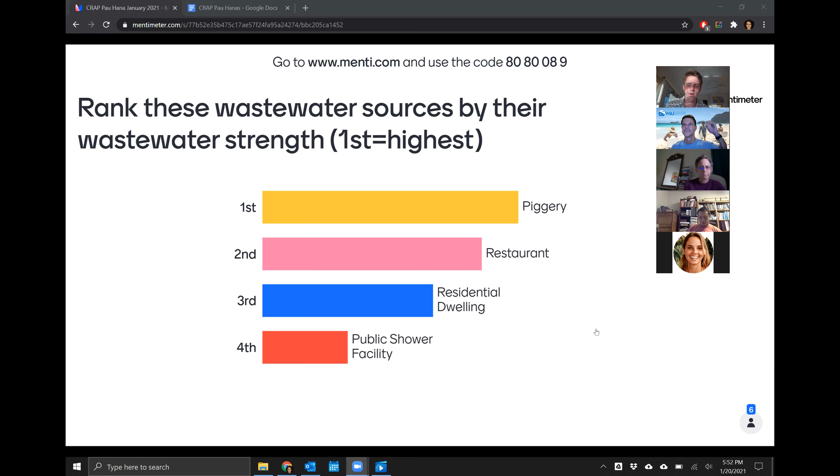Great job. And then the second and last question coming in here. So that should pop up in your phones right now. So piggeries is an example of a high strength source of wastewater. It's higher than your average. So what other sources? We had restaurants, we had a piggery. What other sources of high strength wastewater can you think of?

Got commercial, grease trap waste, distillery, breweries. Good ideas. Industrial, yes, those are all really good answers. Gonna give 5 seconds if somebody else is still thinking of something. Awesome. Great job, everybody. Thank you for participating in that.

All right, now we show the film as we queue up the film. This is a film that was done about our new Cinderella incineration toilet. Forgive the narrator or the key figure in there for his speaking abilities. And this is about the HIMB facility we just did. So go ahead.

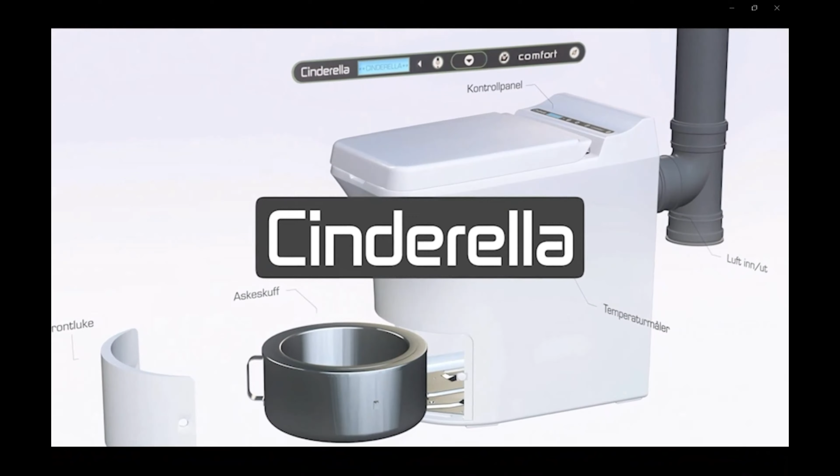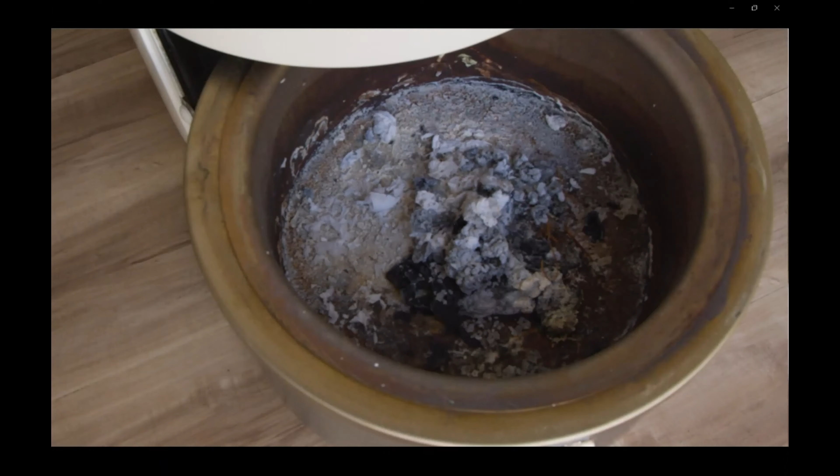So we're here on Moku o Lo'e, which is the home of the Hawaii Institute of Marine Biology. We're an organized research unit within the University of Hawaii, and we're housed in the School of Ocean and Earth Science and Technology. And we focus on all aspects of tropical marine biology. So we have an incineration toilet that is being installed here. We're very excited about it because it's an alternative to waste disposal, which essentially burns waste, both solid and liquid, doesn't require any hookups to municipal systems, produces very little emissions, requires no water. All of these things are important considerations.

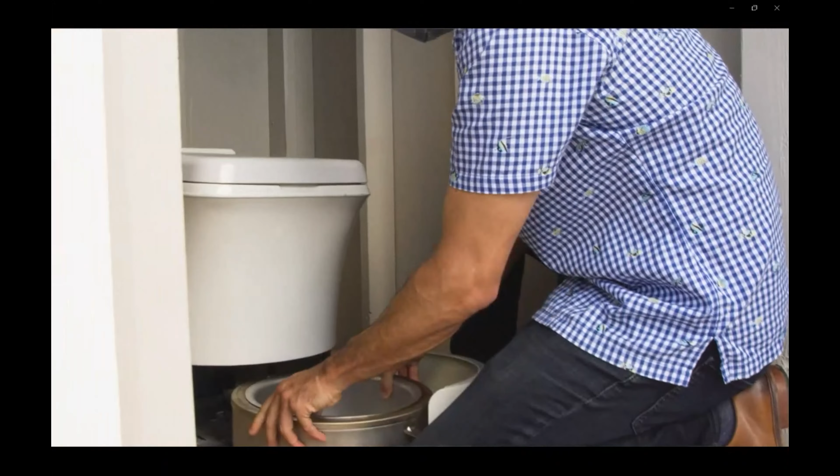We need to solve the problem of sewage in Hawaii in general. Here in Hawaii, we have over 80,000 cesspools that still remain, and it makes us one of the most impacted states anywhere in the country. And we're not going to be able to change that out overnight. So we really need new kinds of technology, new kinds of approaches that are going to revolutionize the way that we fund and build sewage systems to address that. We've only got a couple decades to meet our legal requirement, but really we want to move there as fast as possible, because each passing year you have more and more runoff, more and more leaching of this kind of raw sewage into our streams, onto our beaches. It creates a health hazard for everybody.

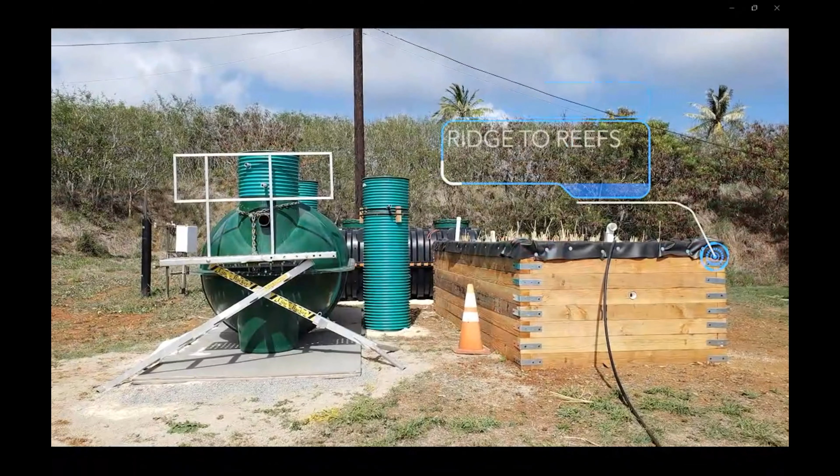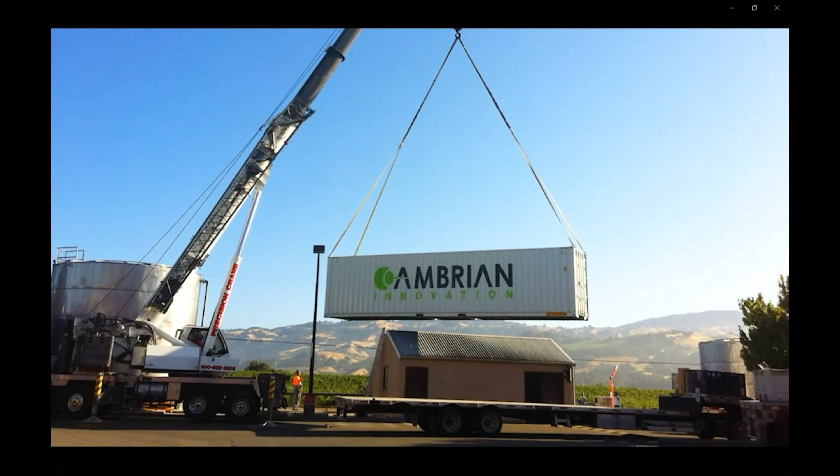We at WAI are committed to finding the most ecological, the most affordable and efficient solutions to wastewater management. There is no silver bullet. So we are trying to bring in all kinds of technologies, including the Cinderella toilet. We're also looking at innovative nitrogen-reducing bioreactors, which are passive systems that do treatment that don't have moving parts. We're also looking at aerobic treatment units that if you live too close to the coast and you're near groundwater, you're going to have to use. All the way up to Cambrian Innovation, which can process up to 150,000 gallons per day. We're excited about Cinderella toilets and their incineration technology, but we have many arrows in our quiver, and we're committed to helping the state, communities, and homeowners with this transition process.

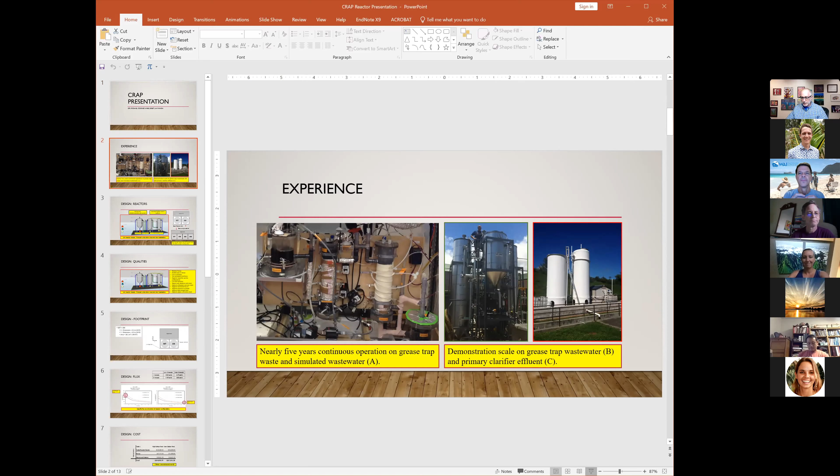Michael, I'm so sorry. Do you want to go full screen? I think that'll be easier for everybody to read. Oh, yeah. Thank you so much. Can everybody see the full screen now?

Great. So I'm trying to present to you a reactor system that I've designed over the years, with many left turns and right turns. I've kind of settled on a system of design I'll show you in a couple of slides that is targeting to treat high strength wastewater, inclusive of slurries and solids within. And it came out of 10 years of work. On the left shows the lab reactors that we ran for almost 5 years. There was 4-5 years of continuous operation and a lot of publications where we looked at various things.

High strength, could we degrade contaminants of emerging concern? And different configurations. We always had a mixing reactor on the left. We always had an upflow biochar packed column. And sometimes we had a second anaerobic upflow packed column. Sometimes we put in an aerobic trickling filter, downflow. And sometimes I had simulated sand filters, sometimes I didn't.

Sometimes down there you can't quite see it, but there's a big containment vessel, and above the reactors you didn't see, I had an aeroponics system, which I used to grow off the treated water tomatoes, bell peppers, and the like. So we did this for like 5 years solid.

Along the line, I worked on some demonstration scale projects. Basically, the main concepts here going into demonstration scale. I designed this system. It was built by my friend Kevin, who was an engineer in Oregon working for Pacific Biodiesel.

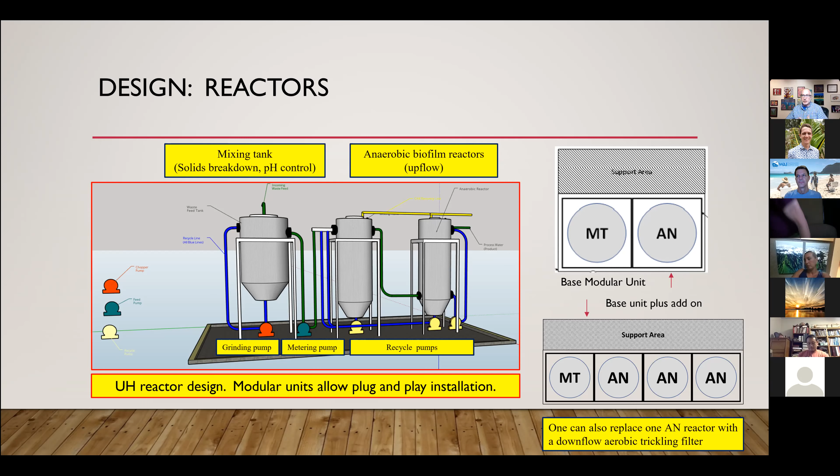Some other advantages. It's a modular design. You can build just a couple of units and you can add on more as time goes on as you need. They can be prefabricated in frames. They fit in containers for shipping. It's a non-permanent installation design. It can stay permanent, but you can also remove it. This keeps you from having to build really large concrete type systems that are then permanent. It can support anaerobic, aerobic configurations as well. Definitely low tech. These pumps can all be analog with dials on them to just control the speeds.

One thing I really like, particularly about the anaerobic packed beds with the biochar, is it supports easy shutdown and restart. These films, even when they dry out, the biofilms, when you restart, the reactor kicks up. So you avoid some of the problems with fluidized beds where you have to build up the flocculated sludge. Supports redundancy and easy repair, incremental buy-in, incremental scale up. Expansion as needed. It can definitely knock down high strength feeds.

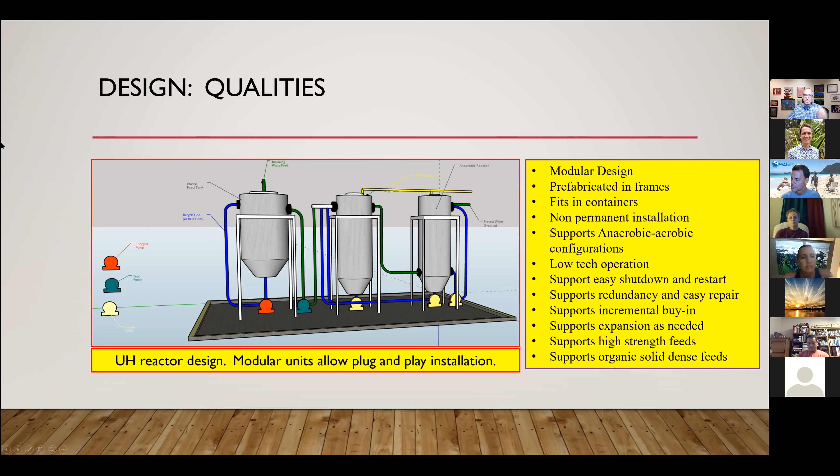Its big selling point is that this mixing tank followed by this anaerobic or several anaerobic columns can really knock down high strength feed. If you want to add on a trickling filter at the end for polishing, you can. Organic solid dense feeds. With the grease trap waste, this chopper pump really ground down and broke down any of the solids that came in. Some basic dimensions. Here is a skid with the mixing tank and 1 anaerobic reactor. It's roughly 4.3 by 4.3, total area of about 196 feet, 18 meters squared, 200 square feet.

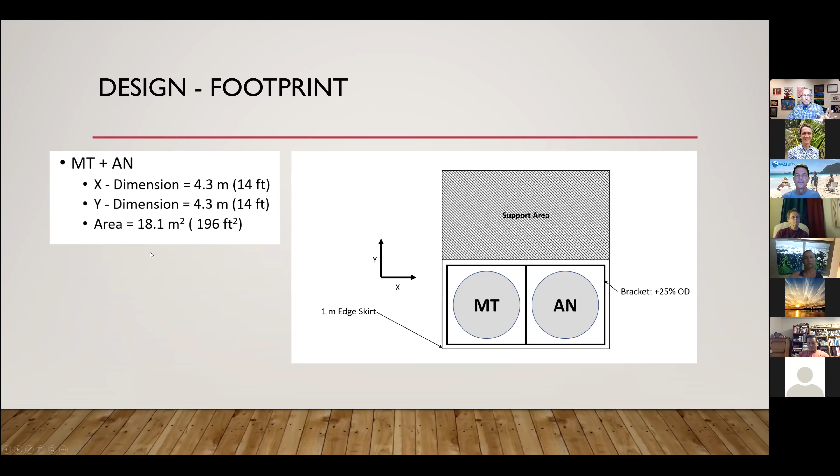And with respect, here is the actual flux. So it's not going to process a lot of water. It's not a really high flow through flux because we're dealing with anaerobic. But I do have plotted here the flux in liters per day per meter squared or gallons per day per foot squared. And if you want to do an HRT at around 1, this is good for low strengths. If you really want to go to high strength feeds, I found this system with 5 days, we can knock down some pretty high strength wastewater, in particular the grease trap wastewater.

On the y-axis, in terms of liters per day per meter squared, these 3 plots are for a mixing tank and an anaerobic. Here's a mixing tank with 2 anaerobics, and here's a mixing tank plus 3 reactors, 2 anaerobic and an aerobic, for example. And what you find is the fluxes at HRTs of about a day are anywhere from 175 to about 250 liters per day per meter squared. For gallons per day per foot, that's 4 to 6 gallons per day per foot squared. At 5 days, we're down around 50 liters per day per meter squared.

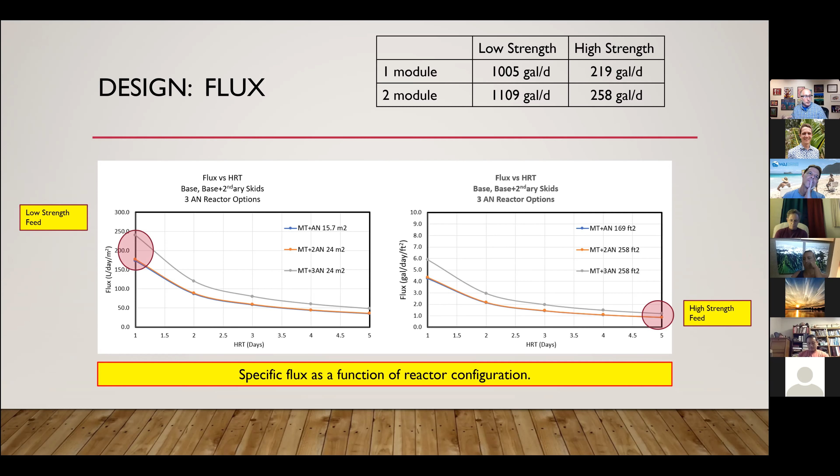And the reason you don't get a huge flow through is because you're dealing with high strength and you're treating it anaerobically, where you get a gas stream off of it. And the anaerobic treatment doesn't produce a lot of solids. So that's a big advantage, as opposed to the aerobic systems, which really produce a lot of solids that you then have to take care of.

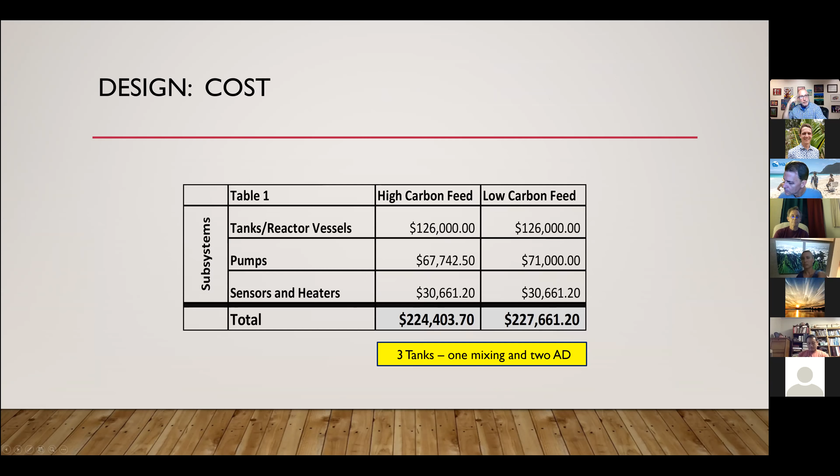We costed it out. We used rough estimates. We were using a manufacturer in Missouri. We looked at pumps and tanks and so forth. 3 tanks, 1 mixing, 2 ADs. For a high carbon feed, it's just a difference in pumps. You've got a few extra pumps, around 220,000, 230,000. If it's a low carbon feed, you wouldn't have to buy the same kind of pumps, basically, to pump the fluids. So that's kind of the pricing.

I'll go quickly in these 3 slides. I just want to show you that I did a theoretical study of about 83 anaerobic digesters out there, wastewater anaerobic reactors, that were dealing with all designs, upflow. We had membrane bioreactors, packed bed, UASBs, continuous stirred tank reactors, anaerobic membranes. I looked through the major ones that were done.

And I did look at 3 metrics. One of them was as a function of the volumetric organic loading rate that was being fed. We looked at what was the reduction in total COD across all of those papers. And I propose an acceptable range of around 80% reduction in COD based on what I saw most of the literature could achieve. And our systems are above that.

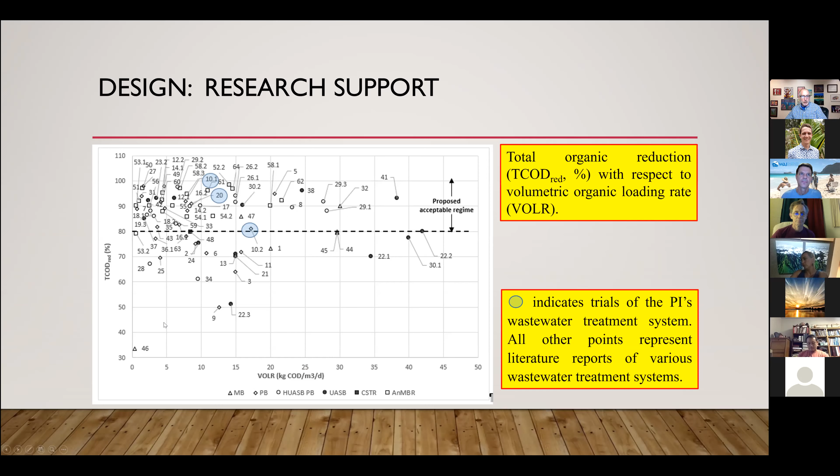I also plotted the volumetric organic loading rate again, kilograms per meter cubed per day, against the volumetric TCOD reduced, that's kilograms TCOD per meter cubed per day. And the straight line is what you'd expect for complete degradation. And I did a linear fit of all the data I got in the literature to propose an acceptable regime. The idea was anybody's design of any reactor ought to fit within this regime. And again, our reactors fit in with that, and we're competitive with anaerobic membrane reactors and so forth.

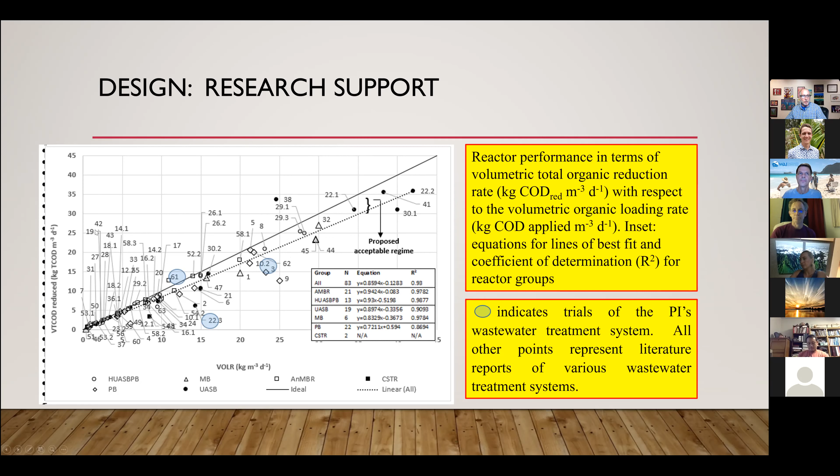Same thing, a third metric was the methane yields, cubic meters per kilogram COD reduced, again plotted as a function of organic loading rate for all the reactors we found in the literature. And the theoretical upper limit is 0.35 based on calculations and theory. That's the most you could produce. Why are there data points above it? People were measuring their gas production rates and they weren't correcting for temperature back to standard state. If you do correct all of that work, you find they all fall below the 0.35.

That just means they were measuring gas rates for gases that were at higher temperatures and therefore had expanded due to the ideal gas law. If you correct them all back down to the same temperature, the same pressure, then you find that they're producing just around 0.35 or below. Our reactors were in there. I thought 0.25, you shouldn't be below it. And we're in that range as well. So that was a way to show that these are competitive.

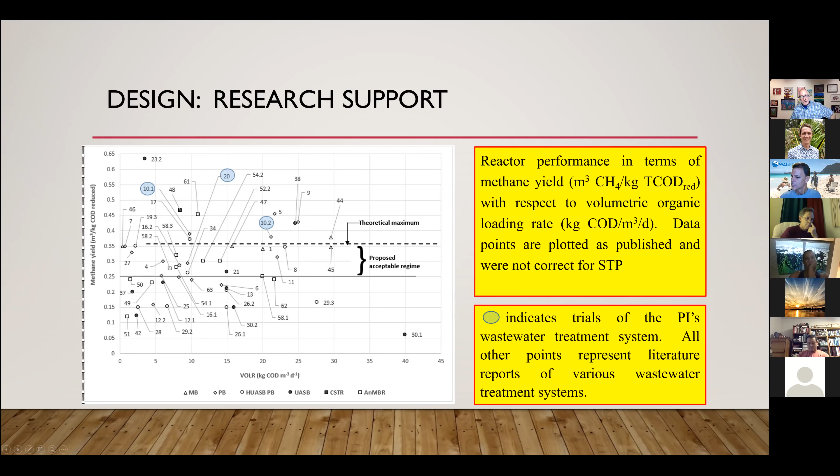We also did a study for a couple of years, not quick, but it was the last one, where we looked at the packed bed anaerobic upflow and the trickling bed down, and we looked at how it dealt with contaminants of emerging concern. And we found that it was able to treat wastewaters highly concentrated with caffeine, estrone, E1, E2, but less so with carbamazepine and 17-alpha ethinyl estradiol. So mixed results, but the idea was that the biofilms might absorb.

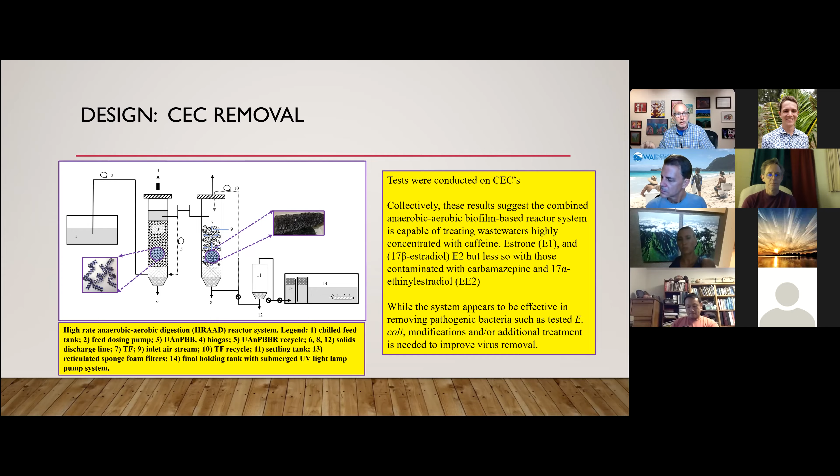And one thing we definitely found when we spiked with these contaminants is that the biofilms would absorb them. And even if they weren't necessarily degrading those contaminants of emerging concern that are far more difficult to break down under anaerobic or even aerobic conditions, you would still get this buffering of the flux through, because the biofilms would absorb and then slowly release them.

So the effluents might still be at low concentrations, even though they weren't being degraded. So if you've got a spike coming through of one of these contaminants, these reactors, even if they don't address that particular contaminant of emerging concern, for the most part will slow it down and broaden out the exit. So maybe you're at lower concentrations that might be below your restrictions.

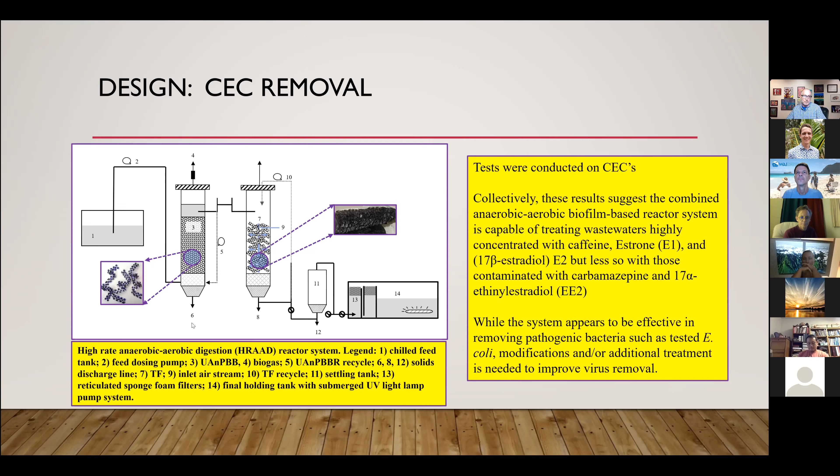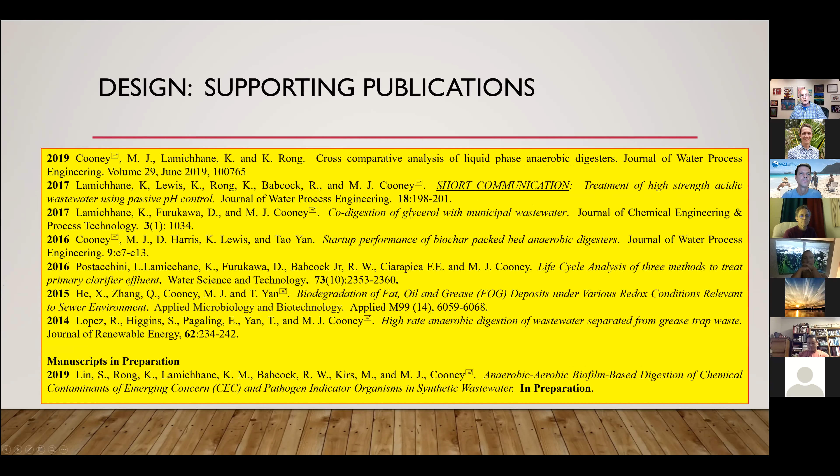And this is just a whole list of papers that I published on it to just show that it's backed up with a lot of academic research. And here are some pictures of the packing materials. This is the biochar that we used. In the trickling filter, we have these large Raschig rings. This is some other kind of packing material that was mixed in with the biochar. These were commercial ribbons you could buy.

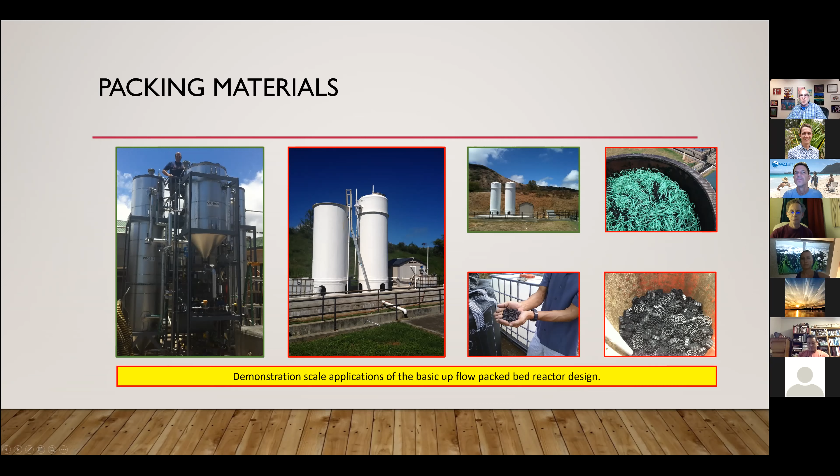And that's it. I have 15 minutes. I think I finished on 15 minutes, so I'll answer questions. Good job. Thank you.

The question, just to jump in: the biochar, where did you get that? It looked perfectly cylindrical. Yeah, so that was a tough one because normally speaking, biochar is all broken down because the main market for it is as a soil amendment. So it already gets ground down.

But I found a couple of companies, one in Canada, a Canadian company that had a contract to sell biochar as a coal substitute. They were taking biomass, trees, and making biochar out of it, and then using it as a coal substitute. The Canadian government was basically subsidizing coal substitutes. So that's how they were making money out of making biochar. And they were looking for other markets.

When I got funded on an internal project at the university, we were looking to trial the biochar in a lot of applications, both in the soil and my reactors. And we had a faculty member who had a reactor to make biochar, theoretically a pilot-scale one up on campus. He never bothered to tell me that he could never get it to operate or get it permitted to run. So I get the money, and then one day I find out he isn't going to produce anything more than lunch bags full.